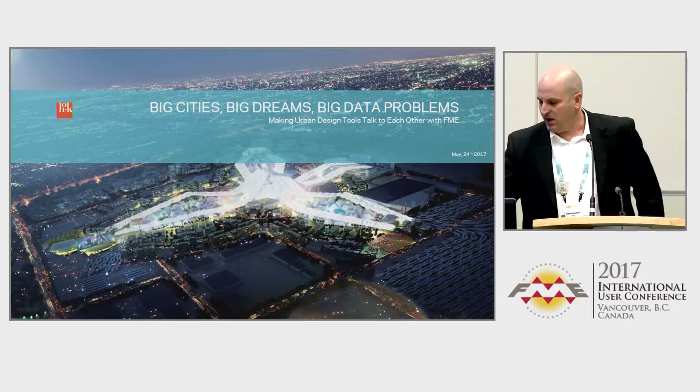Just to go real quick here. We're, like I said, I work for a company called HOK. We're basically probably the second or third largest architecture firm in the world right now, so we're located all over the world. I am working out of our Philadelphia office in the U.S., and I work closely with our New York office as well.

We're in all market sectors. We do everything from skyscrapers to airports to stadiums to hospitals to jails and courthouses, pretty much every sector out there. I personally work in our urban planning division, which I'm very close with that group. I also work in our aviation and transportation group, so you're going to see a little bit of that.

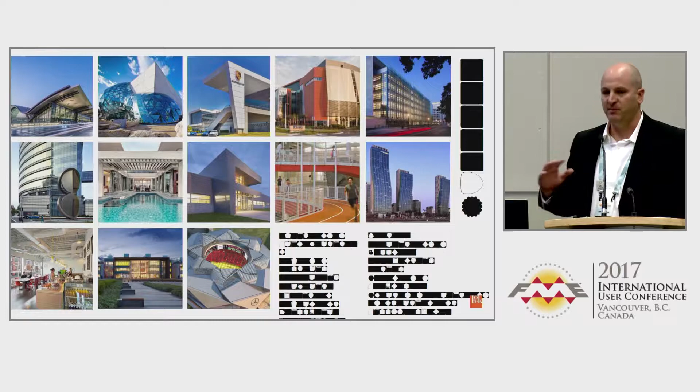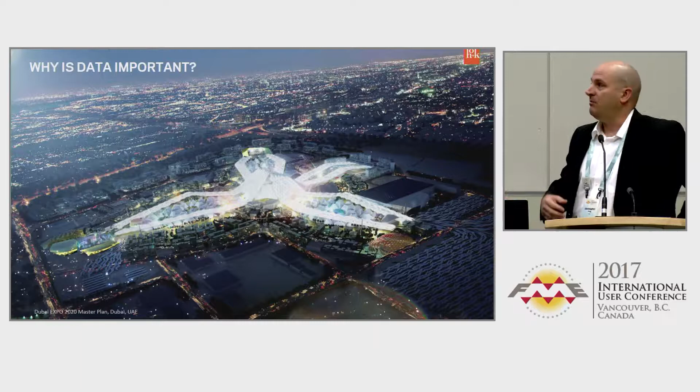So I'm just going to talk a little bit about data and why it's important to us as urban planners and urban designers. There's really two types of data that I see: the data that we generate all the time to plan the cities that we make, and the data that is coming from sensors or anything else that's out there. We're pretty good with the first half. The second half, taking that sensor data or real-time data and incorporating that back into our designs, is one of our big goals. We're not quite there yet, but we see tools like FME as the way to get there.

We know that the quality of the city really has a lot to do with your quality of life, about how happy you are. So if we create an environment that's happy for people, that's functional for people, generally everybody's a little bit happier. That's kind of why we do what we do.

But I just want to give you a little overview. Let's see if this actually plays. Will you play? Please. Oh, that's just lovely. Oh, wait a minute, maybe I just wasn't on the hotspot. Could you mime it? I could act it out for you if you want.

Okay, all right, well, it might not work here. So if we play it, we can probably drag it over. Once we get started... it's embedded. So if we can, wait a minute, watch this. Let's try and play it here. There we go, it's playing. Now let's see, can we drag it over to there? Oh, you're so close, try hold the Windows key and hit the direction you want to go. There we go, okay, there we go. All right, I can't see on my screen now, and I'm using a stupid little finger mouse here.

So anyway, this is basically what this is talking about, how we design cities. Getting it back to the beginning while you talk, thank you.

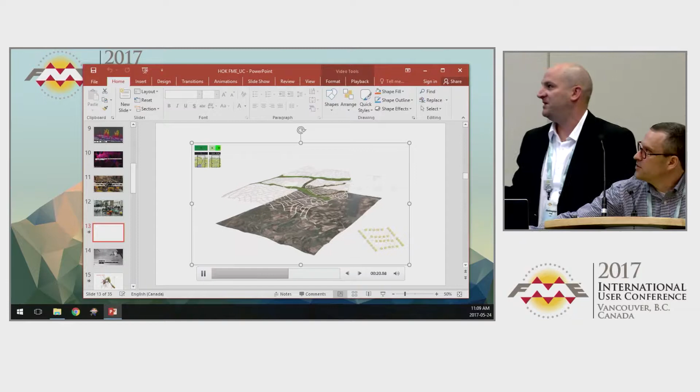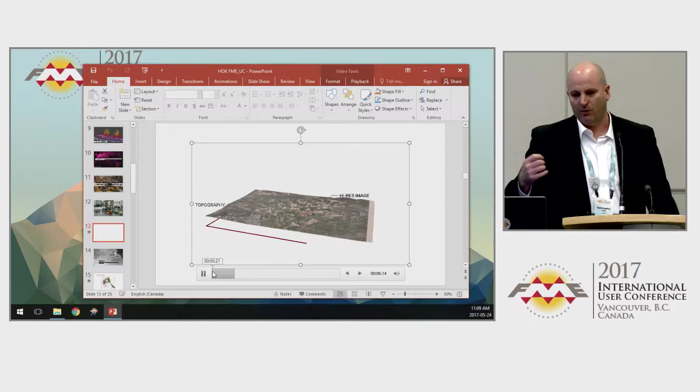Essentially we start with either a greenfield site or an urban infill site, and we have to deal with topography. We get some satellite imagery, we develop a site boundary, we work with satellite imagery, then we start laying out the transportation network, the primary roads, secondary roads, and what they look like and how they function. Then we get into the zoning, or what we call the transects, the land use of each individual parcel.

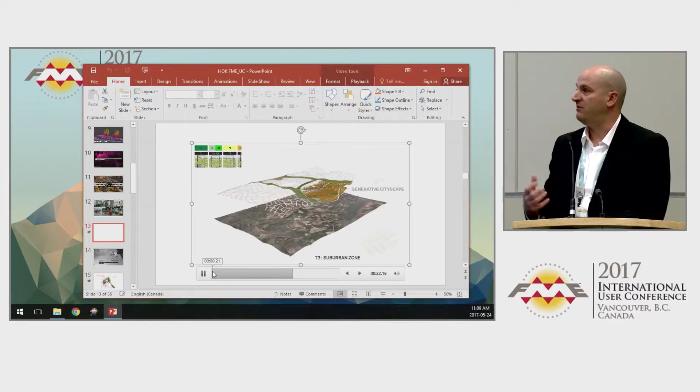We develop what's called a smart code, and I'll talk about this in a second. It's a different way than traditional zoning, if you're familiar with it. It's more about not telling people what they can put where, but how they can build it, or the limits on the site itself. So we'll go through that in a little bit.

I'm going to bring it back again here so I can get it over. Just give me one second. We'll leave it over there, I guess, right? So let's keep going, next slide.

There we go. The problem is, it's a neat way to work, but our tools really don't talk to each other. We use a tool called Revit, we use a tool called AutoCAD, we have some GIS data floating around, we've got satellite imagery, whether that's from Google Earth or something else, all kind of mashed together into InDesign or Photoshop to make a giant book. As much as I keep telling them they like to call what they draw drawings, they're really making maps at the end of the day. When you're talking about urban planning, the scale is so large, we're really talking about maps here. So sometimes they listen to me, sometimes they don't.

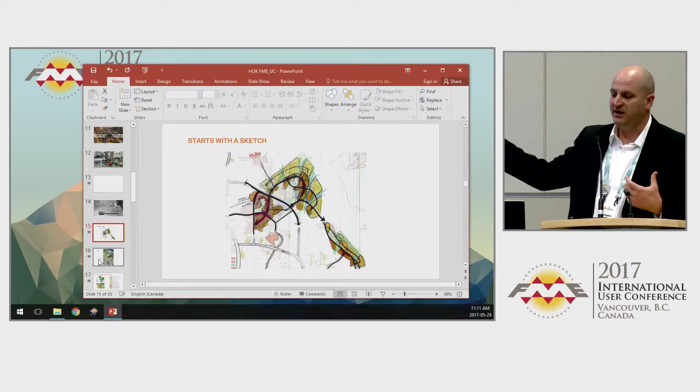So we start with the sketch, things come in like this. We get a lot of designers just working on trace paper. I'm going through our process now. Then we start getting into Revit, right? So this is actually a Revit image, kind of a montage with some satellite stuff. These guys, most of our designers, have no idea how to geo-reference something to get a geotiff to come in and everything. So there's a lot of manual work before we got involved and before we really understood what we were doing.

So this is probably just a hodgepodge of Photoshop and some Revit images. Now, again, Revit is a tool for designing buildings, not for urban planning, so we kind of abuse it a little bit. What you see, those little splashes of color, are actually rooms. They're giant rooms, thousands of hectares or acres big.

What they like about the room tool is that it gives them live data. So as they're moving boundaries of districts, they're getting updates on square footages, and we can assign attributes and parameters to these things, so they're getting information. To them, it's better than using plain AutoCAD with polylines, because they're able to attach data to these objects. But in architecture speak, they're technically rooms or spaces.

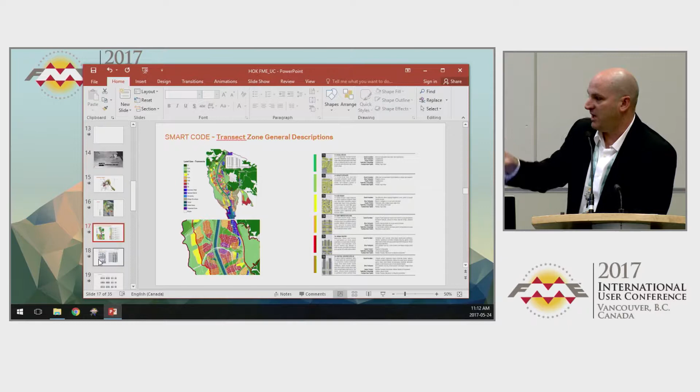Which causes some problems. So we design these things based on a transect system, T1 through T6, T1 being rural, T6 being your urban area. So this is the first block out, then we go through and develop codes based on those transects. As you can see to the right, that's a sectional view of what these buildings could look like.

We may have target percentages about whether it has to be office, retail, or residential, but we don't tell people directly on the lot what they can build. It's basically, if no one else has built enough retail, then yes, you're welcome to do it. So it's a different way of thinking than traditional zoning.

It's not so much a new concept, it's nothing we've come up with. It's actually been around for a little while, and it's called Smart Code. If you want to look it up, it's pretty interesting. You can see it starts to talk about how the frontages work, how the setbacks work, and the different life of the city, what it could possibly be.

Whoops, went too far. Oh, great. Go back to this guy. There we go. Yeah, but I got another video. I'm sure it's going to, as long as this is big enough that you guys can see. I mean, not like you can read anything anyway because the fonts are all messed up.

And the same thing goes with road types. So when we're designing these primary, secondary, tertiary, quaternary, fifth level, sixth level roads, we develop multiple sections on what these things look like. Primary roads might have transport on them, they have a certain type of lanes, they have markings, bike lanes. All these things are developed as part of the Smart Code.

Now we get even deeper into developing social infrastructure—that's your police stations, hospitals, administration buildings, town halls, city halls, cultural centers. We even get into the point where we're locating these types of things. And again, this is just another type of room, right? It's another room in there that we draw with boundary lines, and it has data attached to it as to what it is.

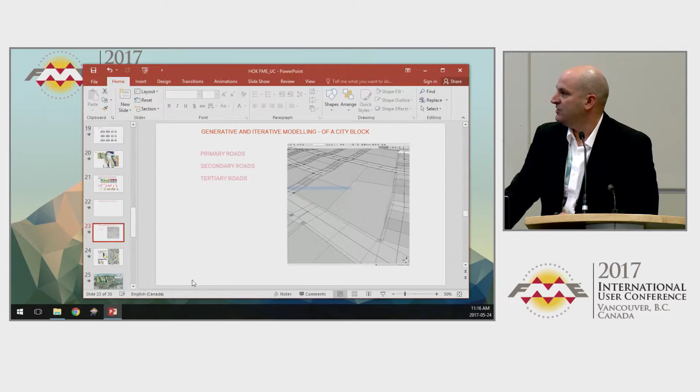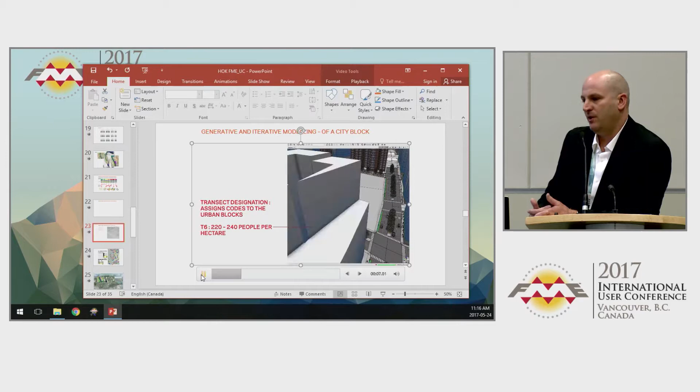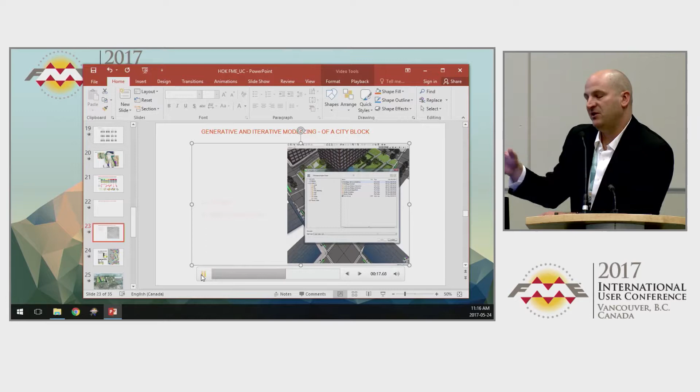Now, sometimes they want us to get a little deeper into the nitty-gritty, so we'll go to that level. CityEngine allows us to do that as well. We can literally model out the primary and secondary roads and show them what those sections look like with the trees, boulevards, cars, and everything else. At any point we can swap things out. All of this is based on underlying data coming from other sources, and that's where FME comes in. We're going to look at that in a second once this is done playing, but you can see it's pretty quick and iterative.

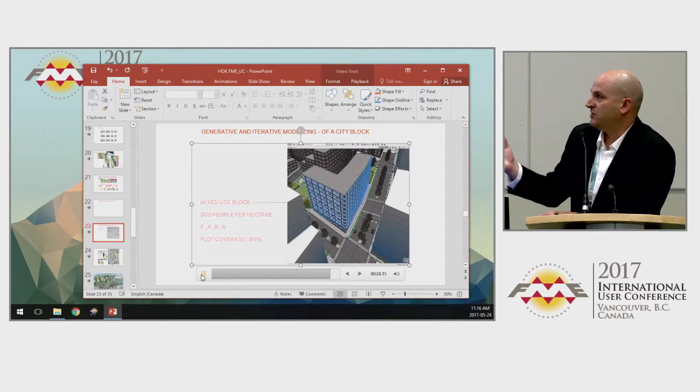The city I'm showing you now, I can't tell you where it is, but it's well over one million buildings that we had to model. So it's pretty big pieces of data that we're dealing with.

So at the end of all that design process, this is kind of what we end up with. We end up with tables in Excel, or with maps. This is technically a drawing, but it really is a map when it comes down to it. So all that data gets put on top of there.

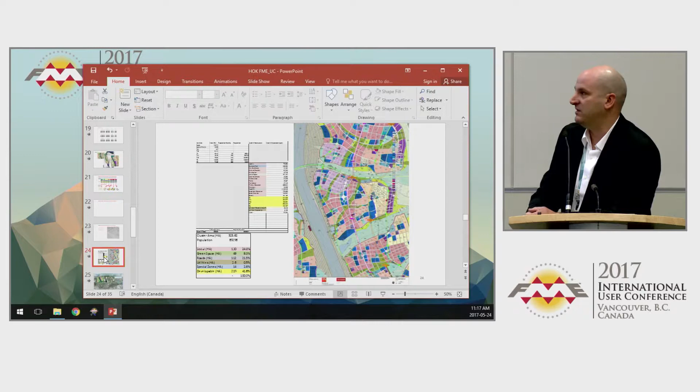Now the problem is, none of this stuff, what you've seen, these tools don't really talk to each other. CityEngine doesn't talk to Revit at all. Maybe it talks to AutoCAD, you can bring in a DXF or something, but not in a useful way. That's really where FME ties everything together. And even with Infraworks, that's one of the tools we've been using lately because it's one of the only ones that can visualize such a large set of data for us and smoothly fly around it and render it okay in real time.

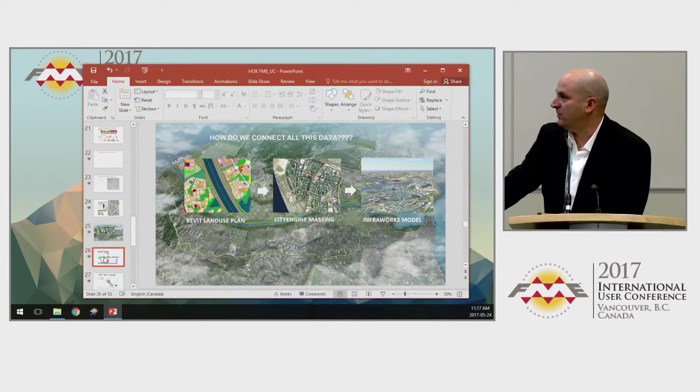So again, how do we connect all this? We have Revit land use plans, we've got some CityEngine massing based on that, and then we've got this Infraworks model. The whole conversation really comes down to this incredibly confusing graphic, but at least the text worked.

So we have Revit, and we have CityEngine, and a lot of times it's Civil 3D, or we'll get a DEM from somebody, some kind of base information. All of it has to go through FME. FME helps us generate stuff from Revit, helps us generate things that CityEngine can use to help generate the massing, which then goes back into FME, which then converts it to IMX, which then goes out to Infraworks, all while keeping the same coordinate system. That was our big challenge—just getting things lined up was huge for us.

And this is where FME kind of sold us. So we've gone in whole hog, and we're doing some other interesting things too that some of my other colleagues here are going to talk about. I think Dave Baldacchino has one on Friday that I suggest you see. So anyway, I'll go into a little more detail about what that's actually doing.

So on this side, there were a couple of images here in sequence, but we'll just talk about it. To go from Revit to FME to CityEngine, CityEngine has this really neat ability to use graphical information underneath, so raster-based information, to drive the rules we create inside of CityEngine. In this case, we're literally taking out of Revit, either via IFC or AutoCAD, depending on how detailed they want to get or how much data they attach to those rooms, and we're just taking a hatch pattern. Basically, if it's a room, I'm taking out that bottom section in FME. Let me see if I can delete this final graphic so we can see the actual workspace.

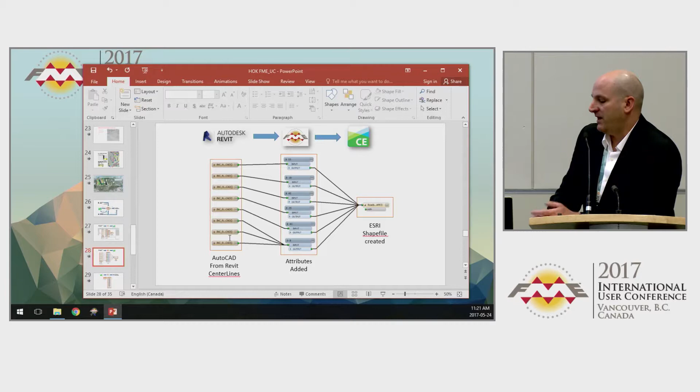So we bring that in, and then CityEngine will literally, you saw the roads there, we'll set the right width, we'll set the sidewalk width, and we'll even, if we have information about whether it's a transport road or a normal kind of boulevard or something like that, it'll apply those rules to it.

So it's quite useful. This is something we would have to do very manually if we didn't have FME to actually add these attributes to it. We'd have to literally make sure that they put things on the right layer or export things out. So it was kind of a simple way to get the actual roads there.

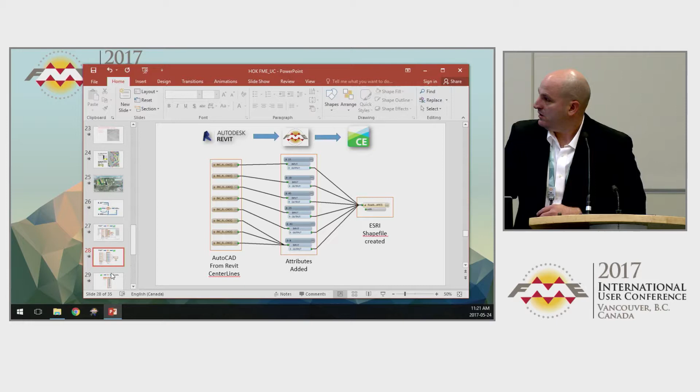Go to the next one. And then once we have all these buildings generated, CityEngine allows us to go out to FBX or 3DS or even a file geodatabase, but file geodatabases are quite slow for us, so we weren't able to use that.

I mean, I see a lot of people shaking heads. It's an ancient technology. So we didn't have a lot to deal with.

But what was nice is FME allowed us to kind of take each one of those FBX models, and CityEngine can either export it as a giant mass of a model, or it can be individual properties, individual lots and buildings. And so what we do is we do it as individual buildings, and then this is the simplest workspace we ever had. It's basically converting FBX directly to IMX buildings.

We're not even worried about terrain at this point. They can be in flat land inside of CityEngine, and then once that IMX is created, if we bring it into Infraworks, it'll drape it on the topography that we already have, which is kind of nice.

So that was a pretty simple one. But again, there's not too many tools out there that can write an IMX file, so we were excited to see FME to do that.

And then lastly, I talked about those land use, those rooms. They're really just, we use them for coverage areas in this case, because in Infraworks, you can kind of apply a shapefile and apply some color to it on that end. So even if we have it set up really well in Revit, it doesn't always mean it's going to match up exactly the way we want it to look in our other tools.

So just exporting this stuff out, we went from, I believe these are Revit Rooms, we extracted the lower polygon and turned it into a shape file, while adding these attributes. This is a mess because this is from very early on, so I'm much neater now with my workspaces.

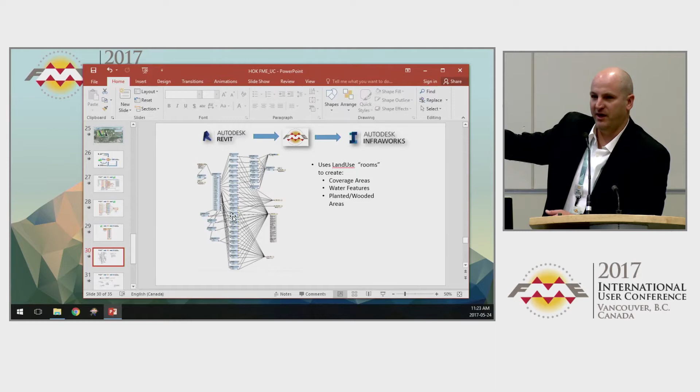But we also have designers who'll model up the little specialty buildings. Like if they have a building they really want to do and don't want CityEngine to generate for them, they'll actually create little masses inside of Revit. So we have to get them into the final model. So how do we do that?

We use IFC. So we're basically exporting out of IFC using building element Proxy. In this case I'm just offsetting because we don't really have a geo-reference location in Revit. You can get one survey point, but that's it, so if you want multiple it's very difficult to deal with. So we use an offsetter to make that change for us and process that to get the thing at least in the relative right location as we go.

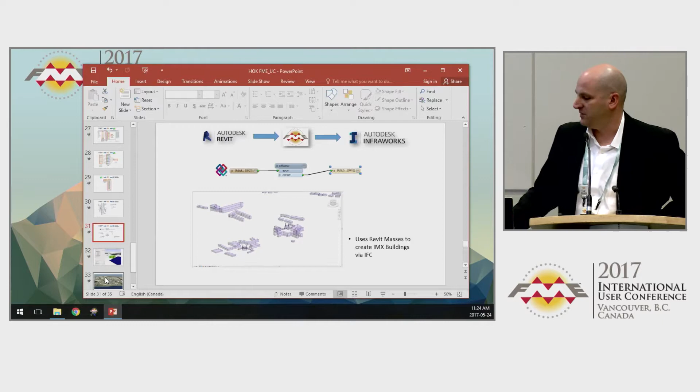And then we write them out to buildings in IMX in this case. I'm going to try to hide that and then undo. Watch this. There we go.

A lot of times what we do is they've built up a library of preset buildings that they like the look of, and they don't know how to write the CGA code that CityEngine needs to build those, so we'll instance them in. They gave me a huge library of Revit families to process and be able to use in CityEngine.

So what we did was, of course, we reached for FME again. What I was able to do was bulk read these things, filter out any duplicates, and get the coordinates for them. Because sometimes they're positioned not at 0,0 and I need them to be at 0,0. So we get that information, offset it if it exists so it comes to 0,0, and then spit out a whole bunch of OBJs for me.

In CityEngine, we can use those directly in the workspace and write rules to insert them. In this case, you can see that blue triangle and that extra lot right there - basically what I'm doing is finding the largest rectangle in there that can possibly fit. I'm giving 50% of that to parking, and the other part I'm saying somewhere in this thing, put a random point and place the building that I want.

So you can see I have 5 or 6 different administration buildings. As you hit the random seed button, those things can alter their position and alter the building itself. So it was nice to be able to write that right into the rules and not have to manually place all those buildings.

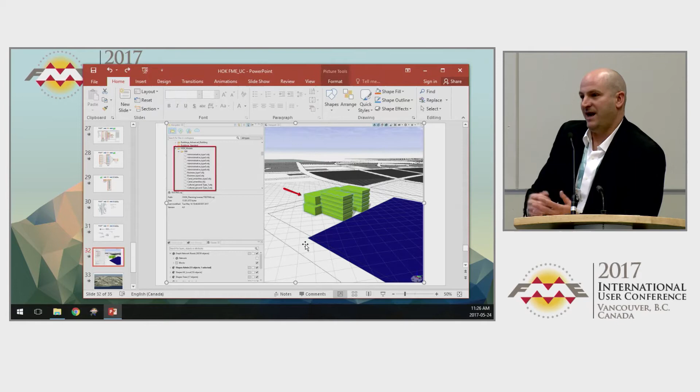So when you have 300 or 400 fire stations to put down, it just happens. It's not always perfect - there's some manual tweaking that still has to happen. But at the end of the day we need a graphic that looks like this, which is what our clients really tend to like - a big graphic they can actually navigate.

This is a live, well obviously not this image, but this is from our Infraworks model that we delivered of one single section of this massive city. There's only probably 7 or 8 zones total, and this is probably 1 or 2 zones put together.

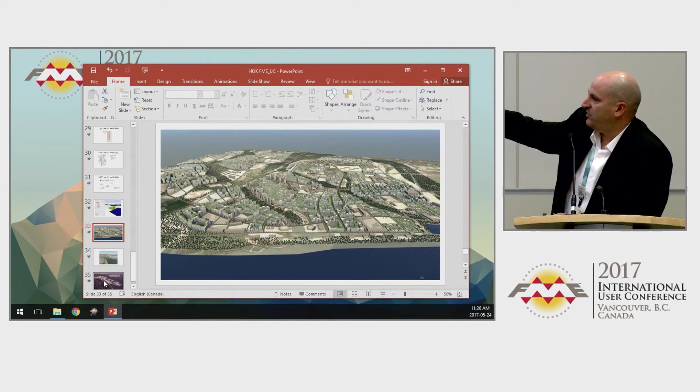What's nice about this is that it is interactive. We can publish this to the web. This is a little bit of an older project for us, so the technology has gotten a little better, but you can see some of that is massing, some of that is manual buildings that have been placed or adjusted.

We can also do little videos like this that really help sell it. Of course this isn't a polished one - this is just something we do really quickly to get an idea of what things look like. But we can send this information off to our renderers to do a really flashy presentation if they want.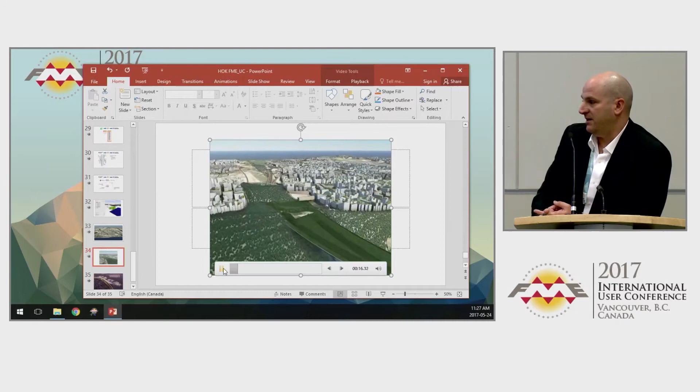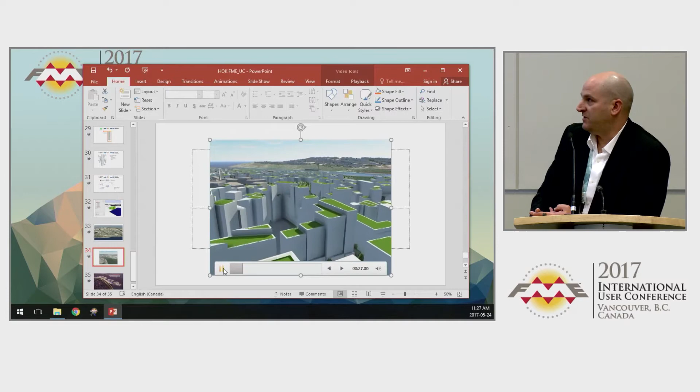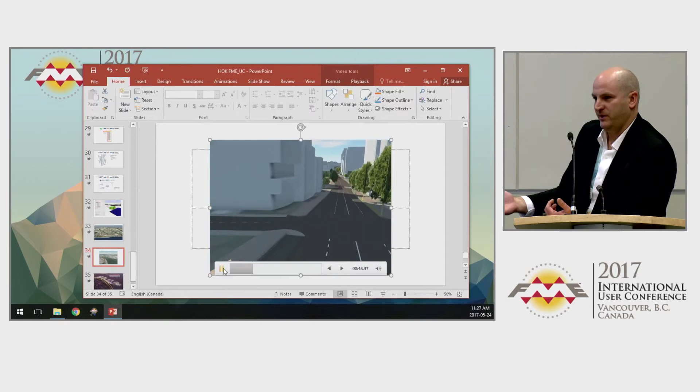So what you're looking at is a combination of CityEngine massing, Revit land use stuff, the center lines from AutoCAD that we got, all draped over the topography from Civil 3D, though we can use a DEM as well. We actually used FME to create a DEM because that's the only thing CityEngine will read. So if we want topography in there, we can't use 3D contours or DWGs, we literally have to create a DEM. I had no idea how to do that until we had FME - that DEM generator really came in handy, letting us extract points and make a grayscale image CityEngine could use.

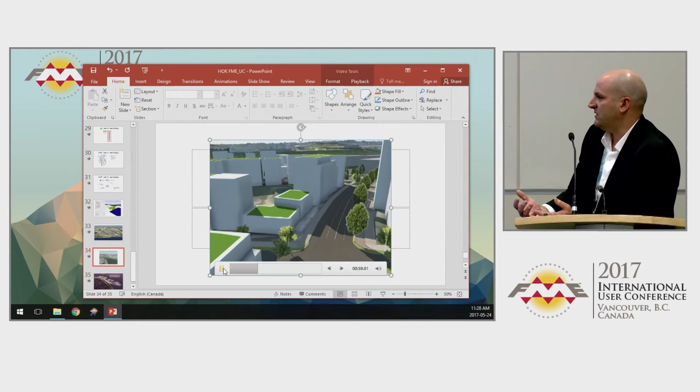I know that was a lot and I went through it quickly, sorry about our font issue. You can certainly email me with questions - I'll take some now, but if you want more detailed information about how we did this, because there was a lot in there and those workspaces were much more complex than what I'm showing, just email me.

I just wanted to say that it is doable. It's really the only way we've found that we can work and give our clients enough of an idea of how a city might look without killing ourselves doing it all manually, which we've done in the past - we would manually model sectors about the size I just showed, and it takes ages.

So with that, I'll take some questions. Anybody?

Sure, what sort of plans - do you model entire cities? Crazy ones, no. Usually for urban planning projects of that scale it's state government, so we're talking major countries. It's a good fee for us to do, but they expect a lot and want to see multiple options - typically 3 or 4 options. Generally we would never have it in scope to do something that large with that many options. I didn't show all the different options, but we did about 3 or 4 different ones.

We would normally do a much smaller representation of the city manually, but what we found through this process is our designers kept wanting more - they want to see more, especially senior leadership, because they really love this stuff and live and breathe it. Being able to see what they think the code is actually going to do, or what it could possibly generate, was a big deal for them. So yes, it's usually fairly large clients we deal with.